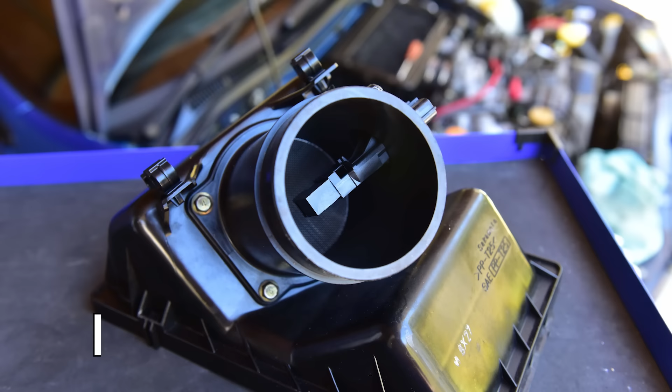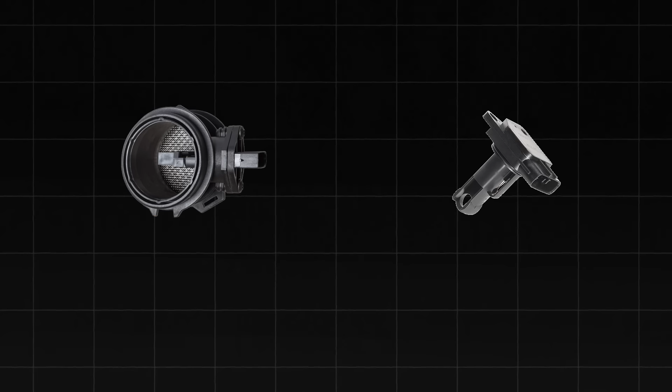Bad MAF sensor symptoms are some of the most troubling things you can experience, but they're also very easy to handle. Today, I'll show you how to tell if your MAF sensor is bad, the best way to diagnose it, and a quick temporary fix that could save money.

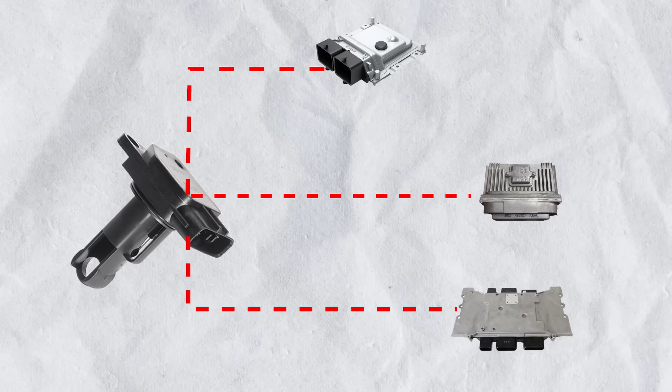First, what is an MAF sensor? The MAF, or mass airflow sensor, monitors airflow into the engine. It provides vital data to the ECU, DME, or PCM, commonly known as the car's computer. This information helps balance the air-to-fuel ratio. Without it, the engine might run too lean or rich.

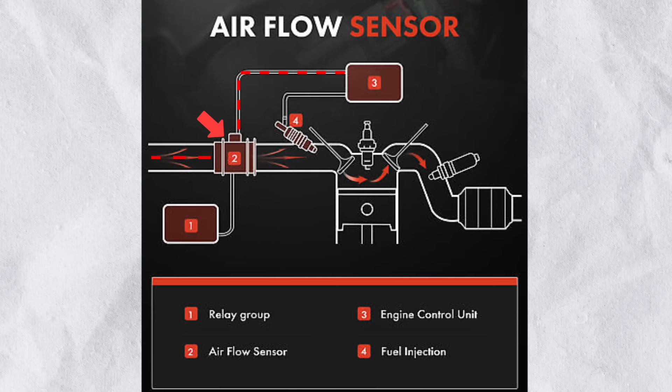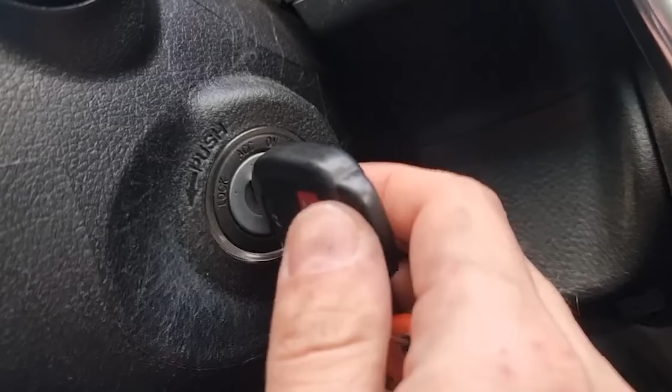By measuring air intake, the MAF ensures smooth engine operation. The control unit then adjusts fuel injection precisely. This coordination keeps fuel economy optimized. But here's the catch. When the MAF sensor starts to fail, the effects are noticeable right away. Here are the main mass airflow sensor problems to watch out for.

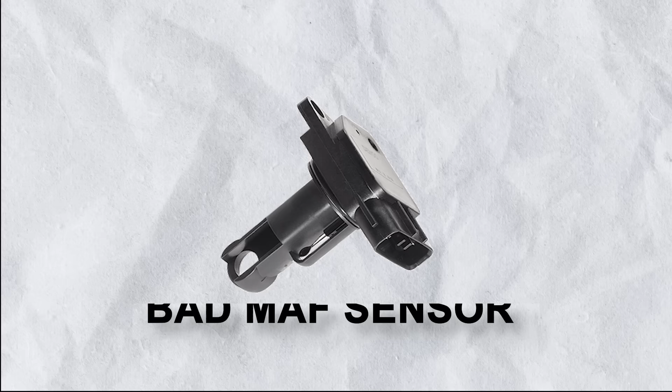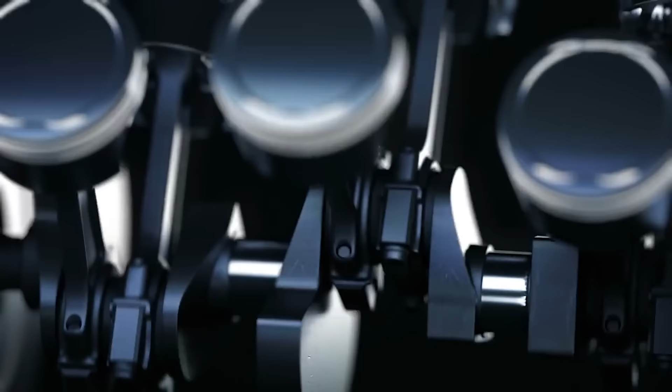The first sign of a bad MAF sensor is an engine misfire. When the MAF sensor malfunctions, it disrupts the balance of air and fuel entering the engine. This imbalance can cause improper combustion, leading to misfires. You might notice your car jerking, surging, or vibrating while driving, especially at a steady speed or when shifting gears.

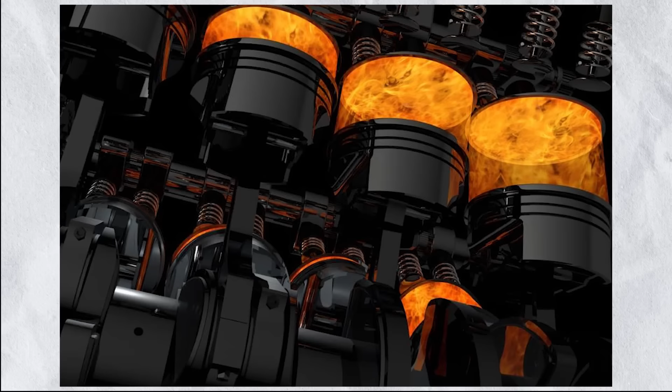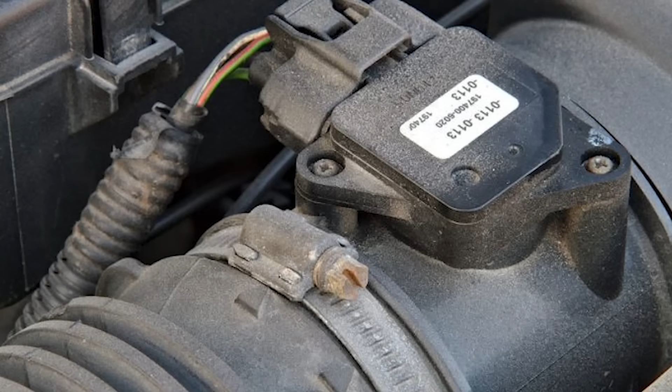The second bad MAF sensor symptom is a rough idle. Like the previous symptom, an incorrect air-fuel ratio will cause rough idles. That is because, at lower speeds, or when you're stationary, the car needs more fuel to keep the engine running. But if the MAF sensor suggests a low airflow, the PCM will decrease the fuel it sends to it.

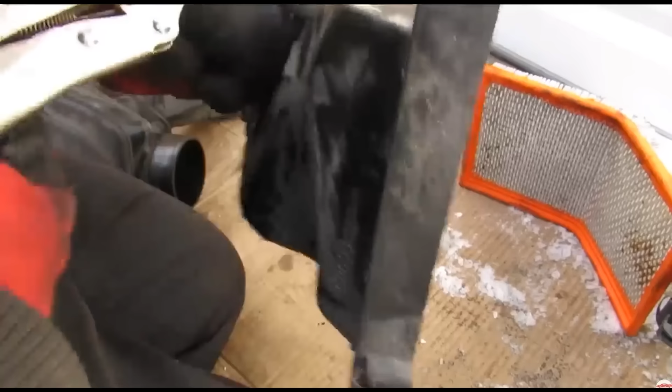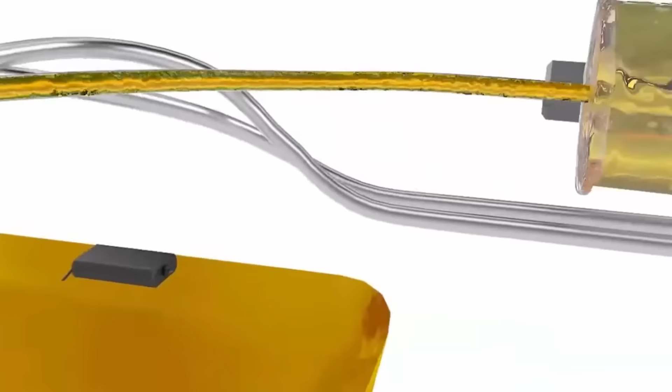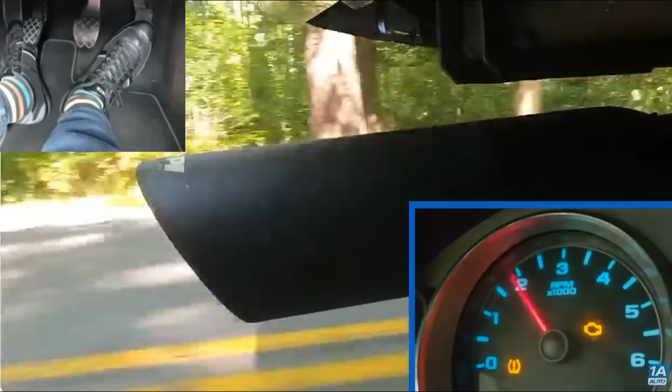The third bad mass airflow sensor symptom is sluggish acceleration. If your MAF sensor has not reached the chronic stages listed previously, you're in luck. However, losing acceleration because of improper fuel supply can also be hazardous. Imagine trying to overtake a truck, only for your car to hesitate at the worst moment. Stuttering and jerking may follow as the engine struggles to balance the air-fuel mixture, making acceleration feel sluggish and unpredictable.

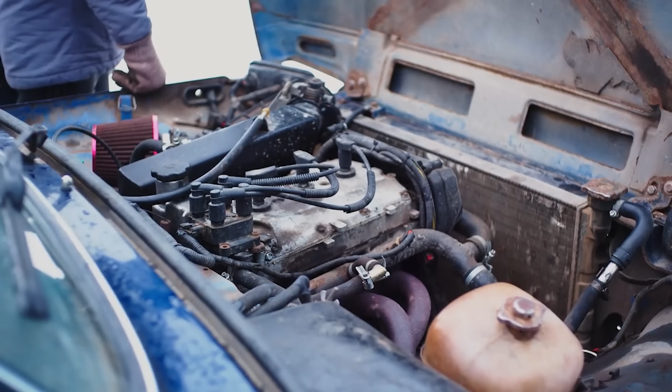The fourth symptom of bad mass airflow sensor is a stalling engine. Too much air or too little fuel, and your car will stall when it's idle. Nevertheless, this is a more common problem for older vehicles. Newer cars have many other sensors that will keep your car running.

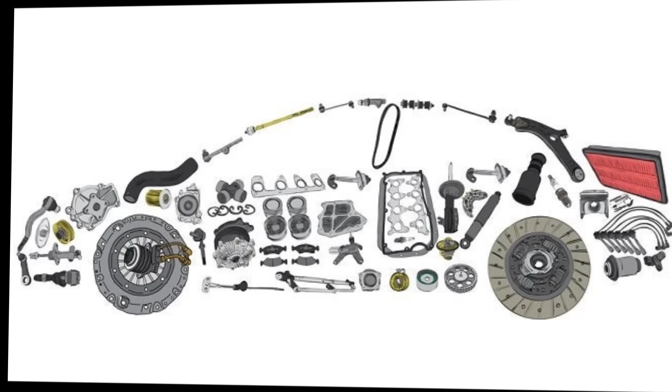However, car parts are like dominoes. When one part goes bad, it will affect others. A dirty MAF sensor can affect the O2 sensor, which then triggers a chain reaction that will also affect the catalytic converter and emissions system. But more on that later.

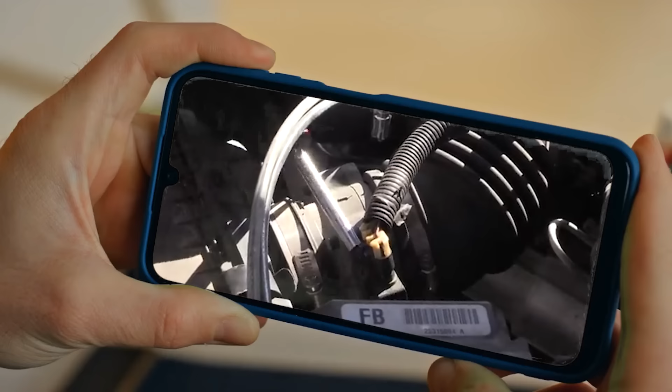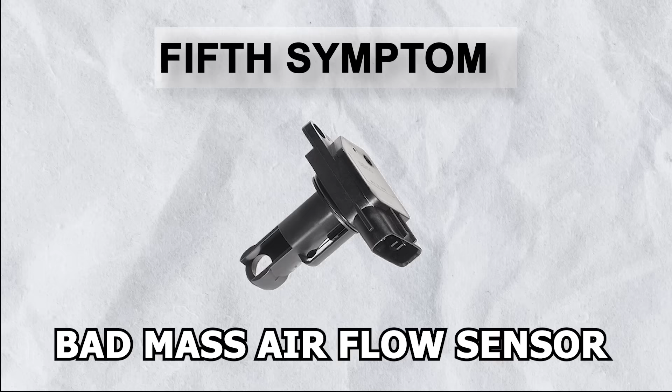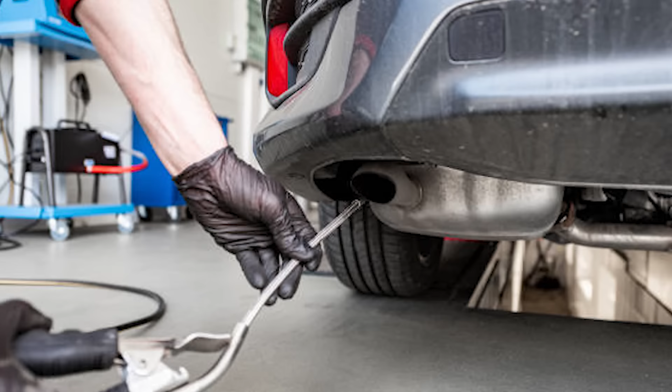Let's move on. The fifth symptom of a bad MAF sensor is reduced fuel efficiency. A failing MAF sensor can cause the engine to burn more fuel than necessary by sending inaccurate data to the ECM. Besides costing you money, your car could fail an emissions test. When your car burns too much gasoline, it will emit more carbon monoxide, leading to a failed test.

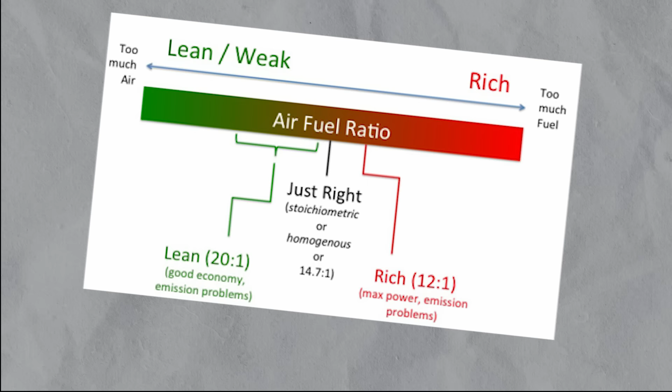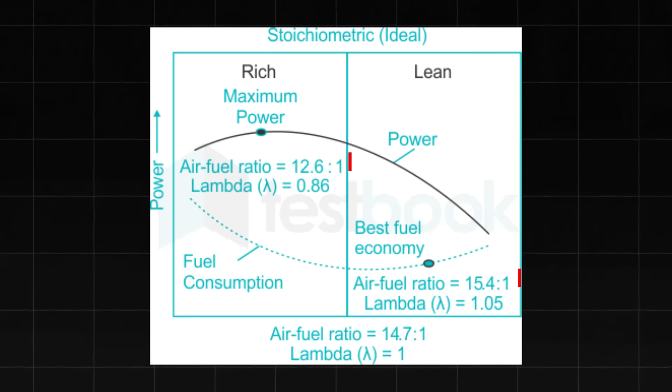The sixth faulty mass airflow sensor symptom is lean or rich air-fuel ratios. A faulty MAF sensor will cause the PCM to inject too much fuel, leading to a rich ratio, or too little fuel, causing a lean ratio. Every symptom listed so far can be linked to this one issue.

To check if your car is running rich or lean, use a gas analyzer, a digital multimeter, or a smell test. If your exhaust smells like fuel, it is running rich. If it smells like rotten eggs, it's lean. Neither option is good, so you must fix the problem quickly.

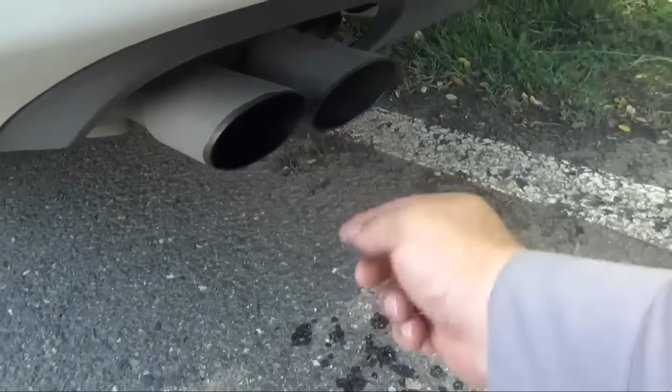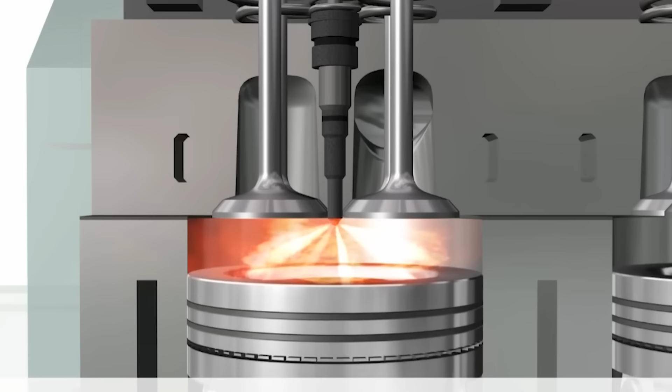The seventh mass airflow sensor problem is the engine not starting. A bad MAF sensor can cause an overly lean or rich mixture, making it difficult for the engine to fire up. It's like trying to light a damp match. It doesn't catch. Of course, many things can cause a hard start, which is why the test I'll show you in the end is important.

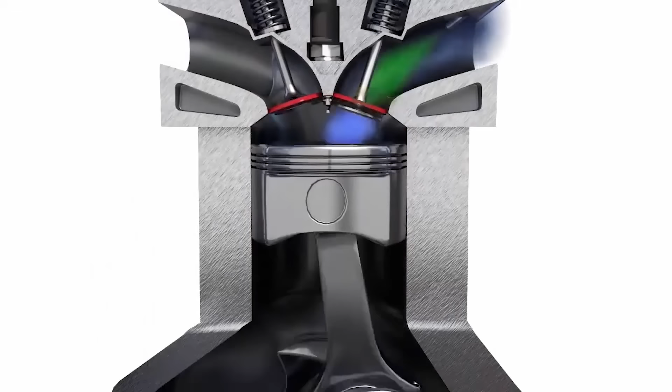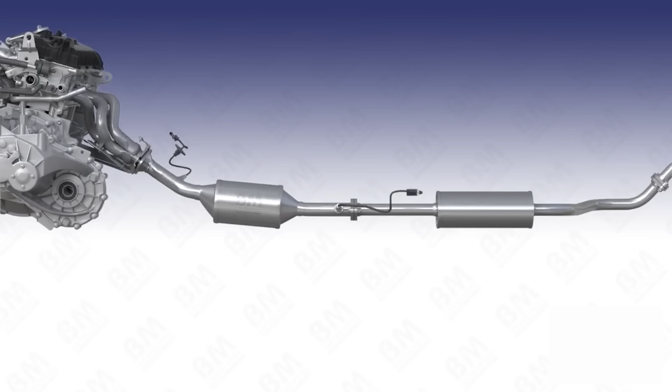The eighth failing MAF sensor symptom is black smoke from the exhaust. If you see black smoke, it means your engine is running too rich, or simply put, burning too much fuel. This can also lead to a damaged catalytic converter, which is a costly repair. When the engine runs rich, it puts extra strain on the catalytic converter, and replacing it can cost as much as $3,500 or more.

The ninth sign of a bad MAF sensor is engine knocking.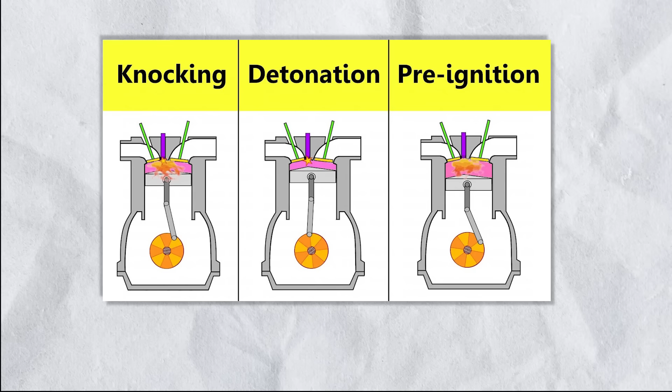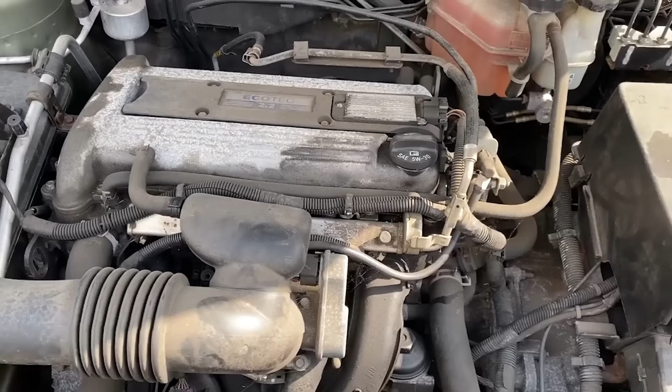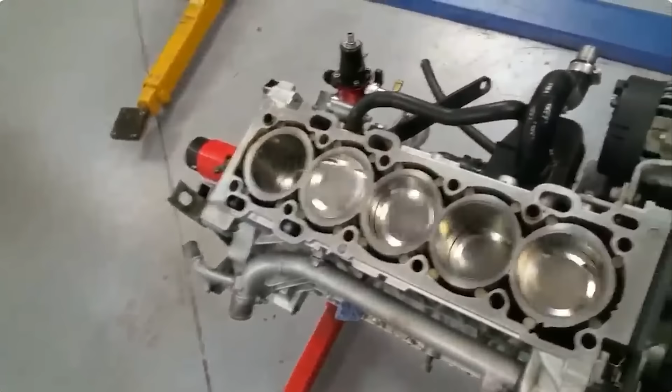If you hear strange pinging or knocking sounds from the engine, it could be due to an improper air-fuel ratio. These noises are a sign that your engine is struggling to run smoothly. The knocking sound is fuel burning unevenly in the engine. If left untreated, this will end up damaging the engine cylinders, which can set you back over $4,000. But don't worry, I have a secret that will help.

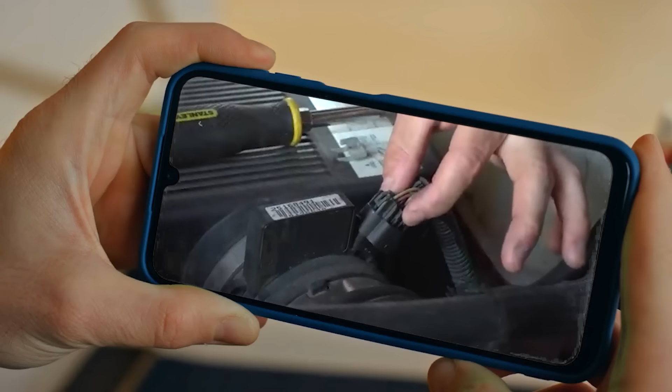The 10th symptom of a bad MAF sensor is the check engine light. I know you've been waiting for this, so I saved the best for last. I kept it last because a bad MAF sensor doesn't always cause the check engine light to come on. If it is on, look for the following codes: P0100, P0101, P0102, P0103. Also, look for air/fuel ratio codes and misfire codes.

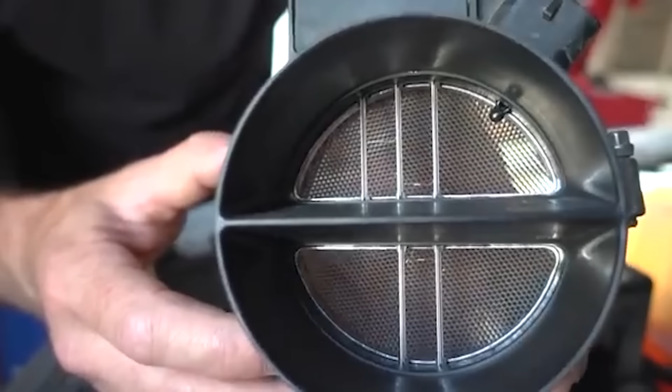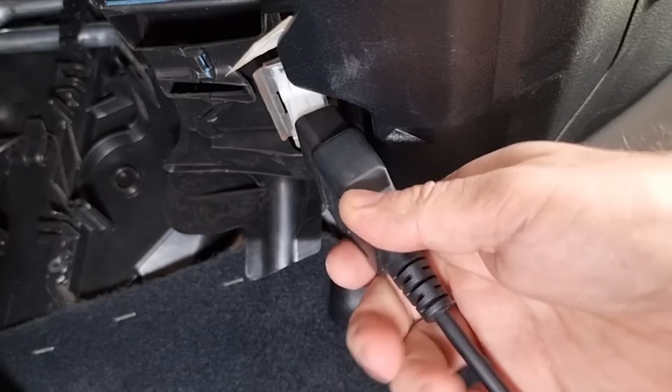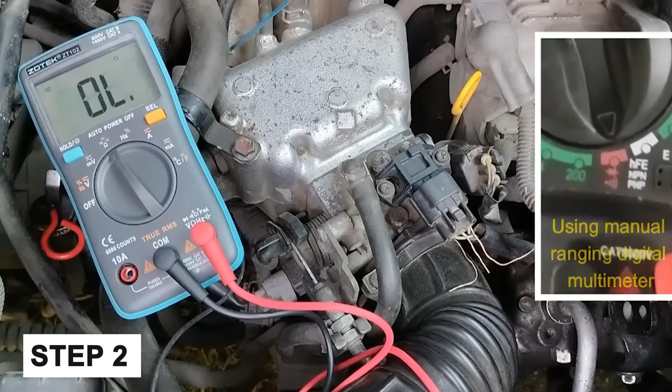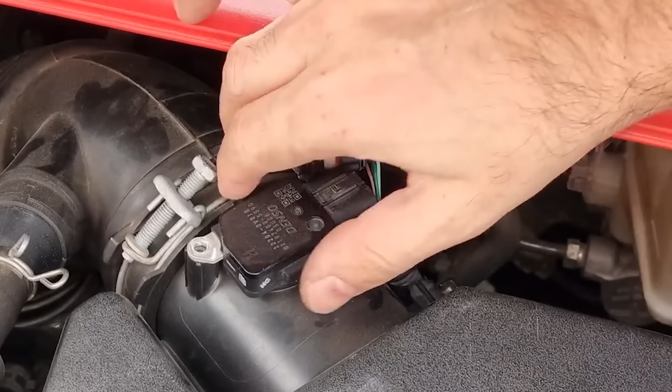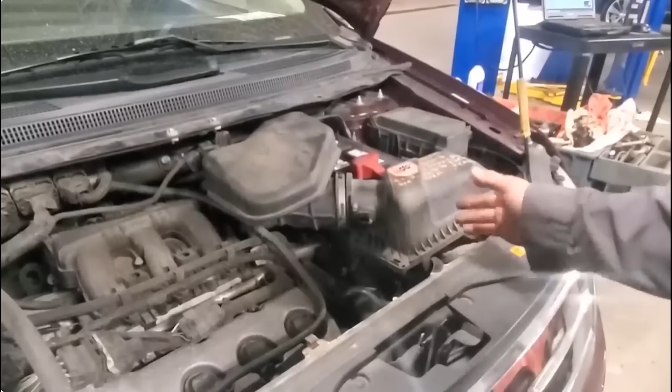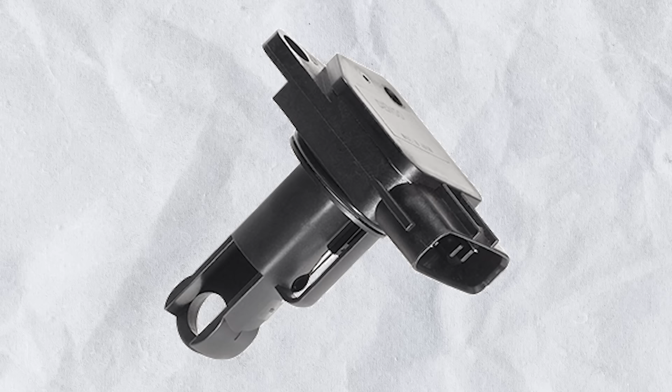Step 3. Locate the MAF sensor between the air filter box and intake manifold along the air intake hose. In most cars, it's found just after the air filter box. Step 4. Unplug the sensor to inspect it for any corrosion. Step 5. Refer to your repair manual to confirm the correct sensor values for your specific model. If the sensor is faulty, you may need to clean it, fix the wiring, or replace the unit altogether. However, if the check engine light doesn't come on but you notice the other symptoms, here's how to know if your MAF sensor is bad.

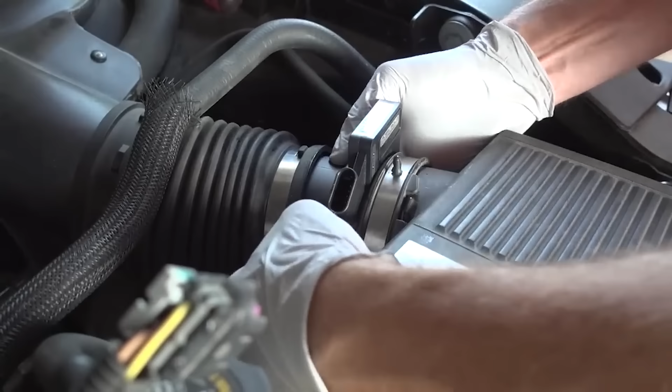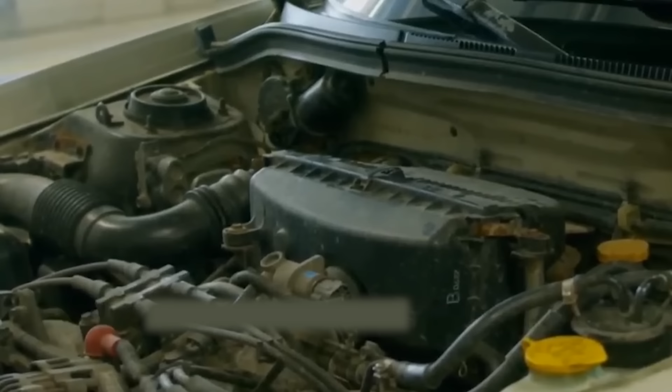The second way to check a bad MAF sensor is what I call the pull test. First, start your car. With the engine running, unplug the sensor's electrical harness. If the engine stalls, the sensor is working fine. But if the engine keeps running, the MAF sensor is faulty.

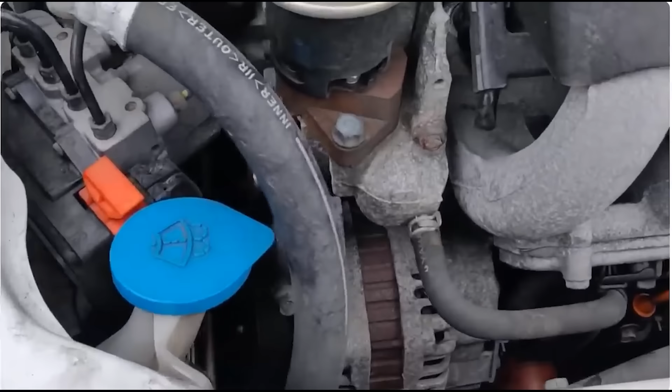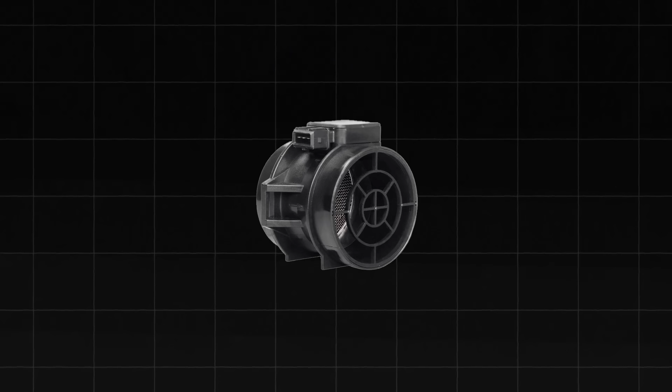The third way to check a failing MAF sensor is called the tap test. Put the engine on and wait for the car to reach optimal temperature and idling. With the butt end of the screwdriver, repeatedly tap the sensor. If your engine responds by revving on its own, stalls, or shudders, it means the MAF sensor is bad and needs to be cleaned or replaced.

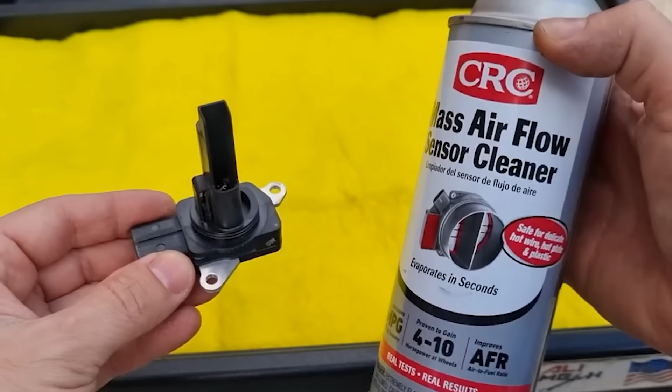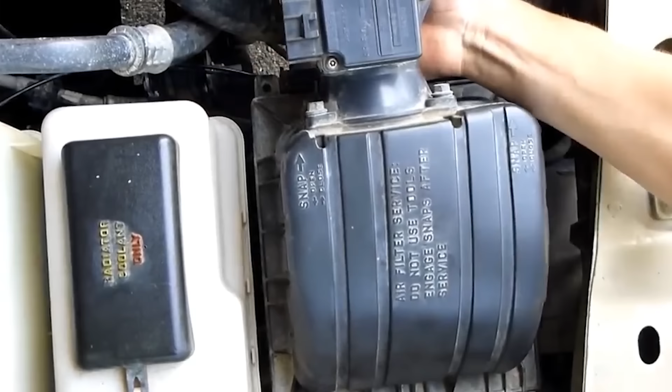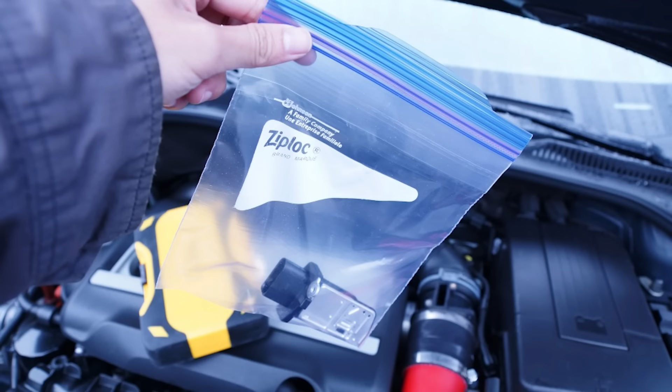How to clean a dirty mass airflow sensor. Cleaning the MAF sensor can occasionally fix the issue, though only temporarily. It's best to clean the MAF sensor every 6 months or when changing your oil. First, remove the sensor. Open the air box and gently remove the MAF sensor with a flathead screwdriver. Avoid touching the delicate wires. They're fragile and costly to replace. Now, you have 2 options for cleaning. One way is to place the sensor in a plastic bag filled with rubbing alcohol. Move the bag to ensure the alcohol loosens and removes the grime.

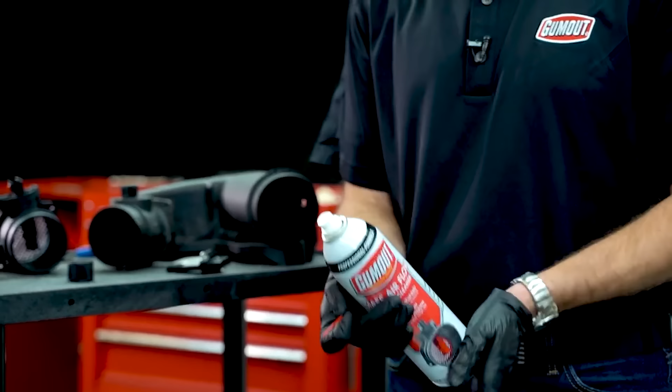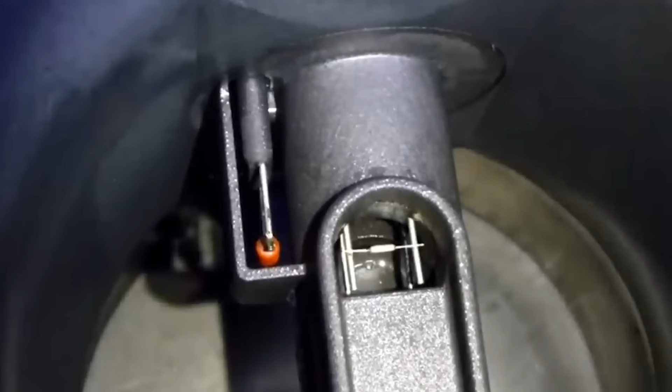Once cleaned, let the sensor dry for at least 20 minutes. Make sure it's fully dry before reinstalling it. Placing it back when wet could cause permanent damage. Once dry, carefully reinstall the sensor and secure it in the airbox.

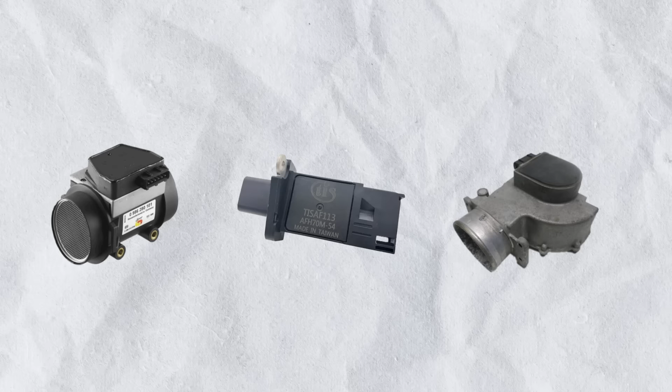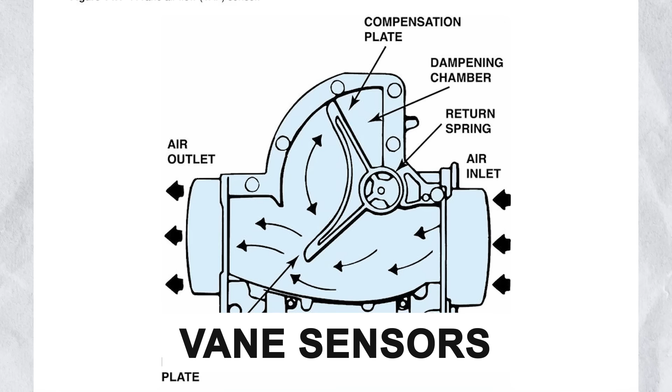Types of mass airflow sensors. Vehicles use 3 types of MAF sensors: hot wire, hot film, and vane airflow. Hot wire sensors measure air mass by adjusting current over a heated wire. Hot film sensors use a thin film for better durability. Vane sensors, an older design, use a spring-loaded vane to measure air volume.

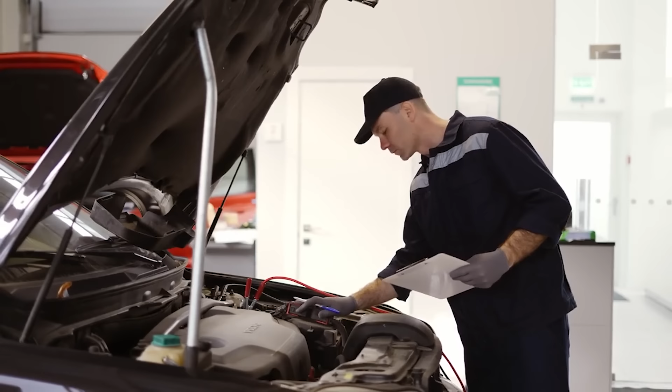How much does it cost to replace a MAF sensor? The cost to replace a MAF sensor typically ranges from $250 to $470, including both parts and labor. Parts alone can cost between $200 and $300, while labor usually falls between $50 and $170. If you notice any of the bad MAF sensor symptoms mentioned, diagnose and address potential issues promptly. Follow the diagnostic steps outlined in this guide to confirm whether the sensor needs cleaning or replacement.